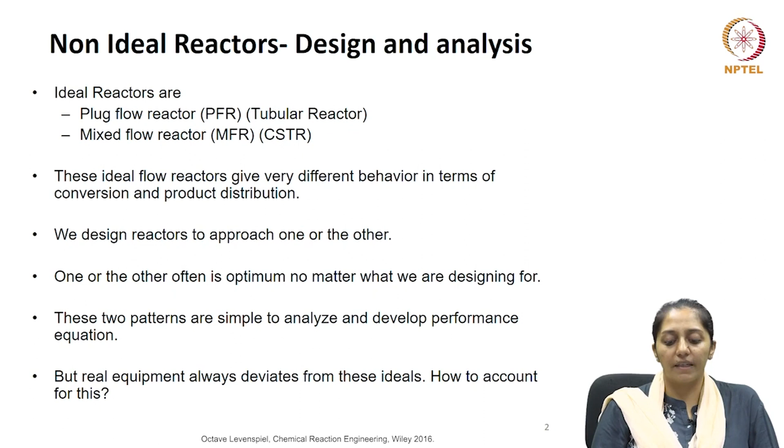But practically speaking, there is always deviation from ideality. So how to account for this deviation? First, we need to understand what are the sources of deviations. So deviation from the two ideal flow patterns can be caused by channeling of the fluid, recycling of the fluid, or presence of dead space, which is the stagnant regions in the vessel.

So if you see on the slide, various kinds of flow patterns have been shown here, including the stagnant regions shown above in the two figures, where there is effectively no mixing happening, no fluid currents are there, and then the bottom two show the channeling and the short circuiting, not going through the entire path but taking the shortest route or the least resistive route. Now this behavior is found in all types of process equipment, like for example heat exchangers, packed columns, or your bioreactors. It should be avoided since this will lower the performance of the unit.

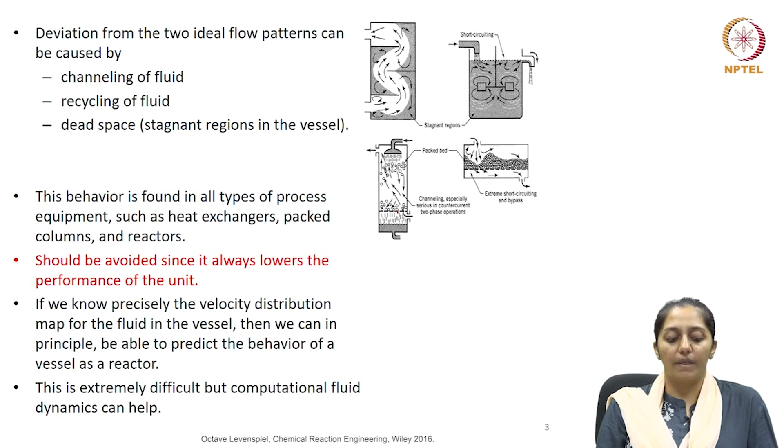So if we know the velocity distribution map for a fluid in the vessel, then in principle we should be able to predict the behavior of the vessel as a reactor, whether it will behave as an ideal reactor or there can be non-idealities. So you see, in case of non-ideal behavior, the flow patterns or the fluid movement changes inside the reactor in terms of its velocity distribution pattern. So this is extremely difficult. However, computational fluid dynamics here can help.

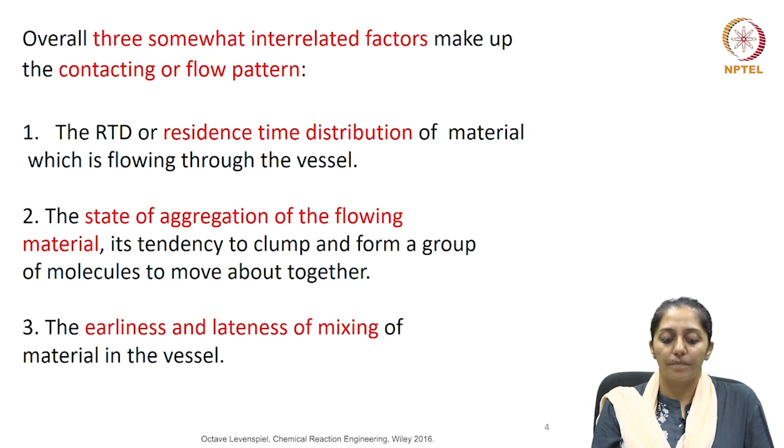So three somewhat interrelated factors make up the contacting or flow patterns. One is the residence time distribution. This is of the material which is flowing through the vessel. Then the state of aggregation of the flowing material, which means its tendency to clump or form a group of molecules which move together. The third aspect is earliness and lateness of mixing of the material in the vessel.

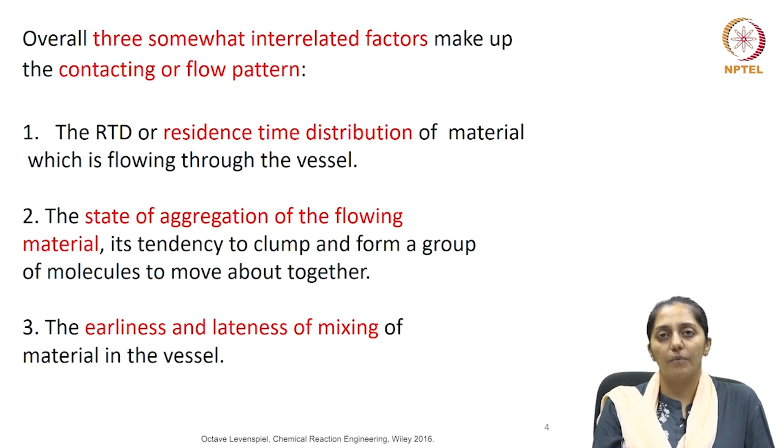So let's talk more about residence time distribution. Now for designing the reactors, it is enough if we know how long the individual molecules are staying in the vessel, or more precisely, the distribution of the residence times of the flowing fluid elements. Now, this information can be determined by using tracer techniques. It is also referred to as stimulus response experiments. The analysis is restricted to steady flow patterns without reactions and without any density change of the fluid through the vessel.

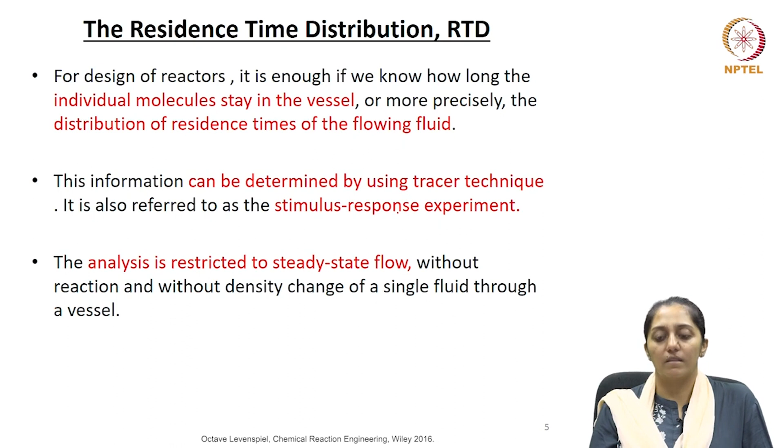So, state of aggregation of the flowing stream. If you see the picture on the slide, this is a mixing where they have shown gas mixing with not very viscous liquids. So, individual molecules are free to move about and intermix in case of microfluids. Non-coalescing droplets or solid particles or very viscous liquids are some examples of macrofluids. So, you can see here in the picture, the molecules are grouped together as aggregates or as packets. So, this is the way the two fluids can behave differently. One is the microfluid and the other is macrofluid.

So, a single phase system will lie between the extremes of the two, macro and microfluids. The solids behave as a macrofluid, while the gases will come under microfluids. Now, for a two-phase system, like for example a gas liquid system, either phase can be a macro or a microfluid depending on the contacting pattern, which means that either gas can be dispersed in the liquid phase or the liquid can be the dispersed phase in the gas.

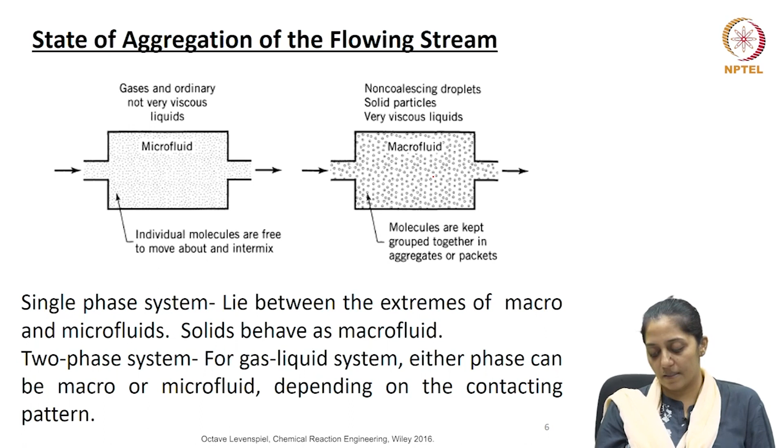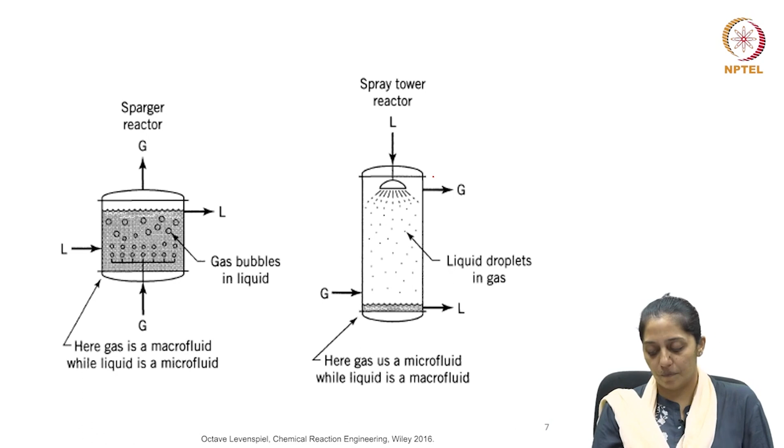So, like the picture shown here, this is a sparger reactor. Here the gas is the macrofluid while the liquid is the microfluid. So, the gas bubbles are moving up. Now, if you see a trickle bed reactor or a spray reactor, tower reactor, then the liquid becomes the macrofluid and the gas is the microfluid. The liquid is being dispersed in the gas phase.

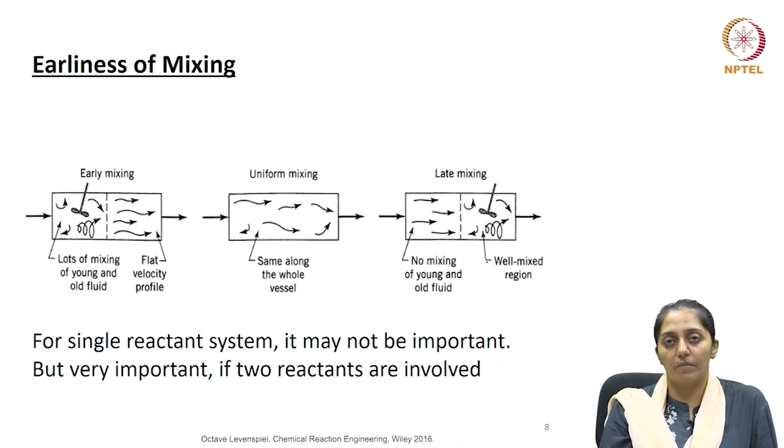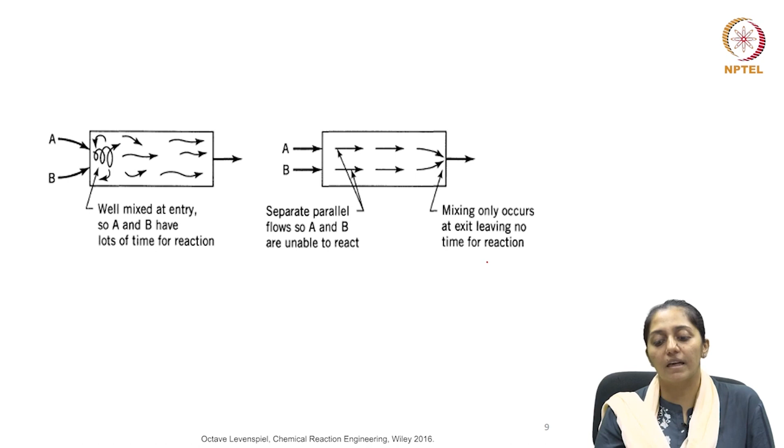Now, for a single reactant system, this may not be of that importance, but it becomes very important when there are two separate reactant streams and they are supposed to react to give the product, as shown in the picture on the slide. So, A and B have to be well mixed at the entry so that they have enough time for reaction. If A and B have late mixing, then there are separate parallel flows of A and B, they are unable to react, and only at the end the mixing is happening, so giving no time for reaction.

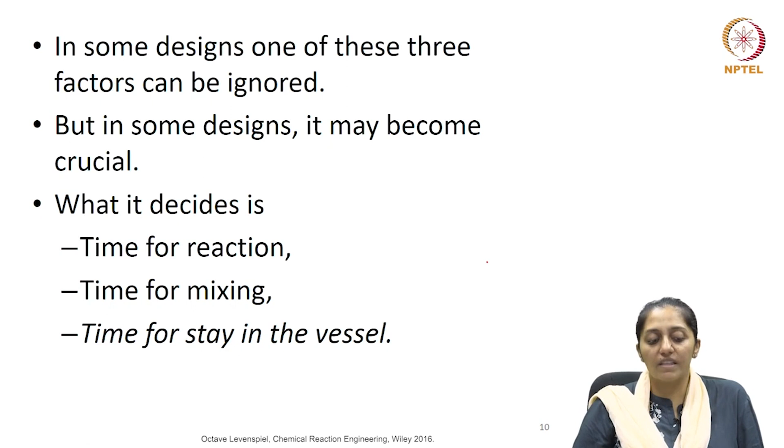So, in some designs, one of these three factors can be ignored, but in few designs it may become crucial. Why? Because it decides the time for the reaction, the time for the mixing and the time for stay in the vessel. So, all these three things are governed. So, in order to find the residence time distribution,

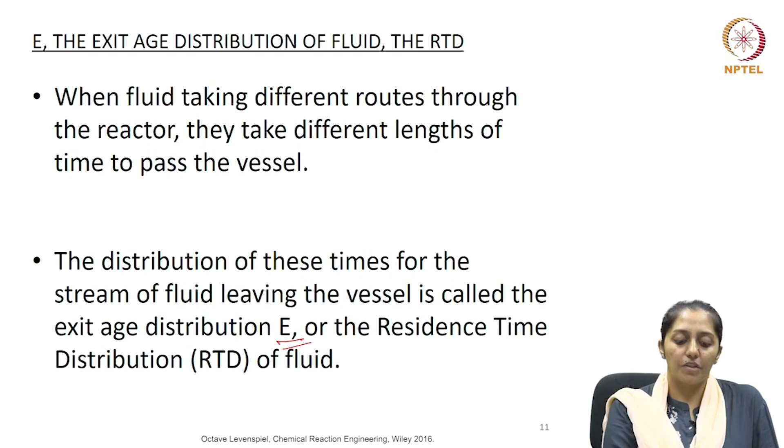which is also called as the exit age distribution of the fluid, we make use of the tracer experiments. Now, when the fluid is taking different routes through the reactor, they can take different lengths of time to pass the vessel, isn't it? Now, if we consider all these different fluid elements entering the reactor, going through different time spans inside the reactor before they pass the vessel, this distribution of times for the stream of fluid leaving the vessel is called the exit age distribution, denoted as capital E, or the residence time distribution of the fluid. So, I will repeat, the distribution of these times for the stream of the fluid is called an exit age distribution, denoted as capital E, which is same as the residence time distribution. We generally call it RTD of the fluid.

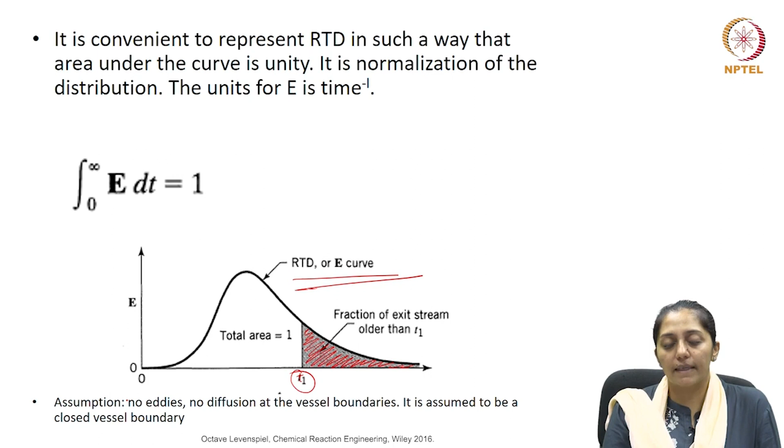Here we are assuming that there are no eddies, no diffusion at the vessel boundaries, and it is assumed to be a closed vessel boundary. So, using the E curve, one can determine the fraction of the exit stream older than a particular time or age. So, the fraction younger than age t1 can be given in terms of the integral from 0 to t1 of E dt, the portion shown in white color here. So, the fraction older than t1 would be 1 minus the integral from 0 to t1 of E dt, which is the same as the integral of E dt with the time limits of t1 to infinity.

So, the E curve is the distribution needed to account for the non-ideal flow. Now, how to find it for a vessel?

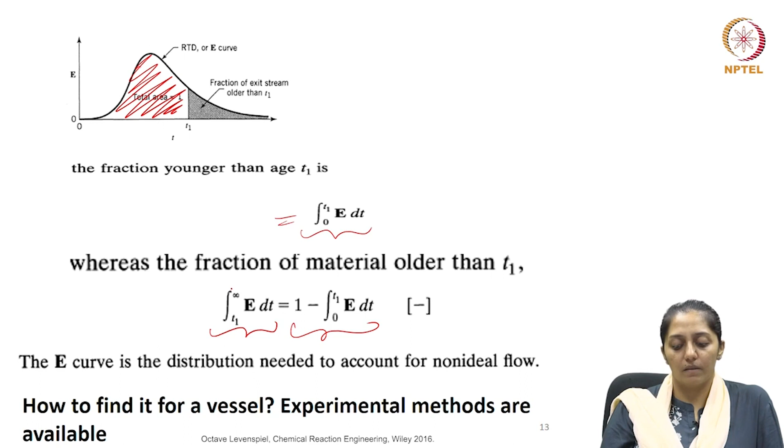The simplest method is to use a non-reactive tracer for finding the E curve. Here you can make use of a pulse input, a step input, a random input, or periodic inputs. Mostly pulse and step inputs are used because they are easy to analyze, as shown on the picture here.

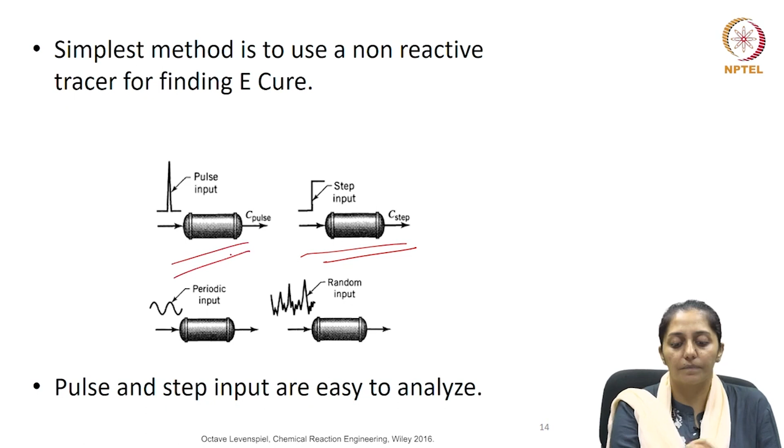Let us take first the pulse input. In the pulse tracer experiment, please make note of the notations to be used here. Let the vessel volume be V meter cube. The fluid flow is represented by small v, and the vessel volume by capital V. Into the fluid entering the vessel, we instantaneously introduce m units of tracer, in kgs or moles. So, this is a pulse experiment.

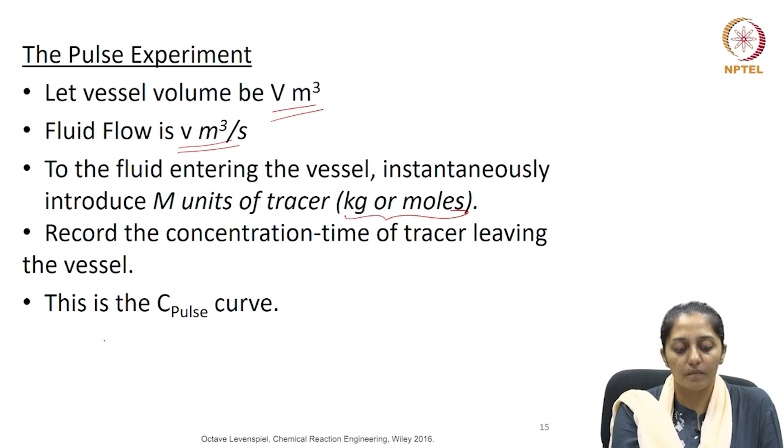So, suddenly we introduce m units into the entering fluid, and at the same time we begin recording the concentration versus time profile of the tracer leaving the vessel on the other end. So, here we are giving the pulse input and here we begin recording the concentration versus time of the tracer. Now, this concentration versus time profile will be called the C pulse curve.

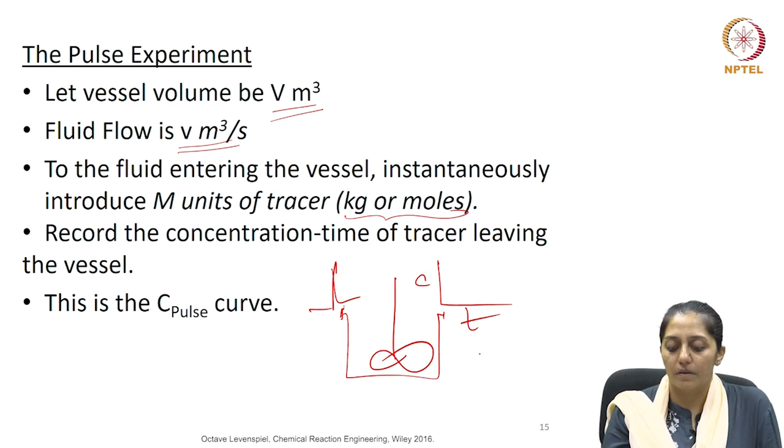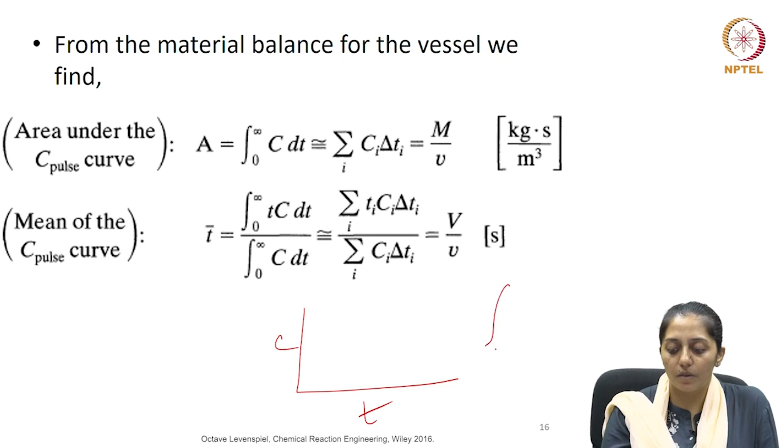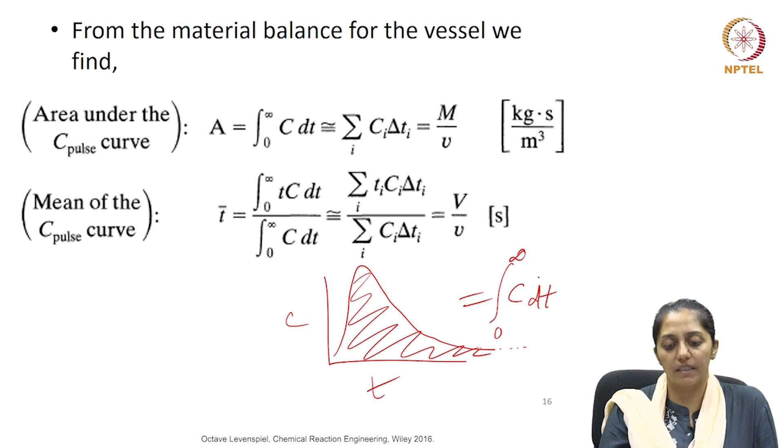If we do the material balance for the vessel, we find that the area under the C pulse curve can be written as the integral from 0 to infinity of C dt. So, this will be the entire area under the curve. In terms of small equidistributed time intervals delta t, we can reduce it to the summation of Ci delta Ti, which is nothing but the total amount of tracer which was added divided by the volumetric flow rate, in meter cube per second. So, this is the area under the curve.

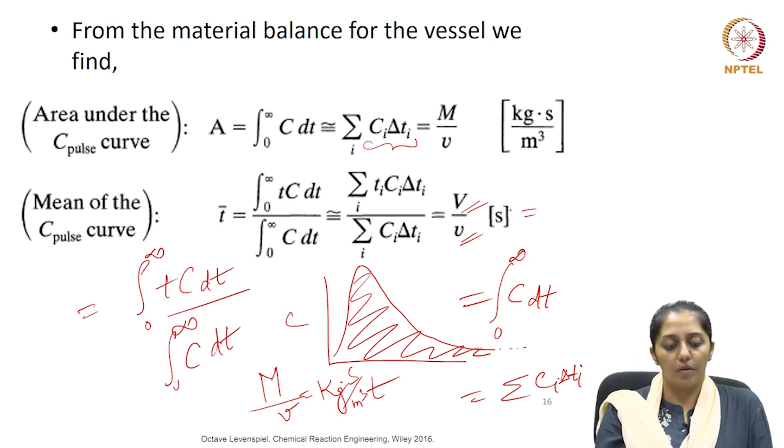Now, the mean of this curve can be determined by using statistics as shown here. So, your mean residence time can be obtained. We now know it is F by V inverse, which is V by F, the volume divided by the small v, volumetric flow rate. As the m amount of tracer is instantaneously introduced into the fluid entering the vessel, when we start noting down the concentration, it will rise to a value and then start decreasing because of the subsequent dilution by the incoming stream.

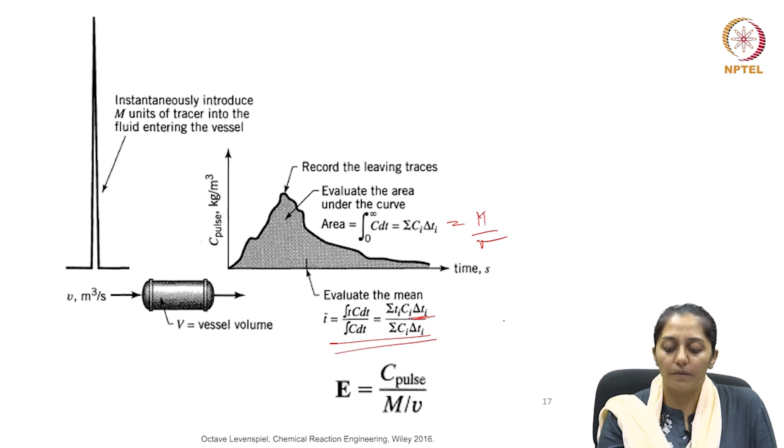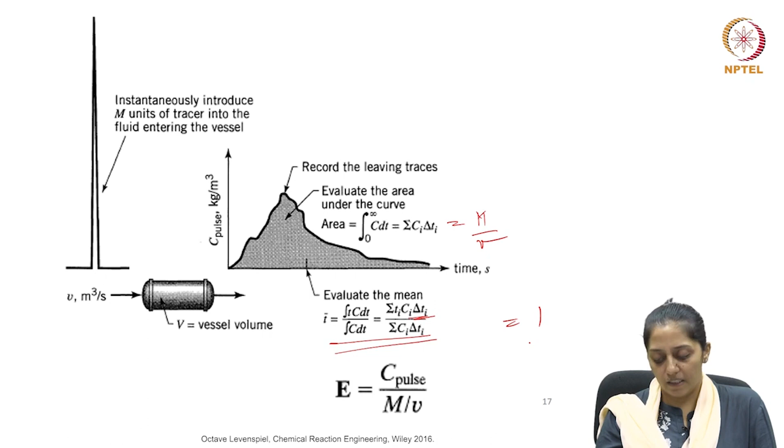So, the area under the curve is nothing but m by small v, and the mean residence time can be given as the summation of Ti Ci delta t divided by the summation of Ci delta t. So, your E curve can be obtained from the C pulse curve. Now, the area under the curve is equal to 1 for an E curve. So, if we divide the C pulse values by m by v, then we should be able to get the E values. This is what is done to convert a C pulse curve to an E curve.

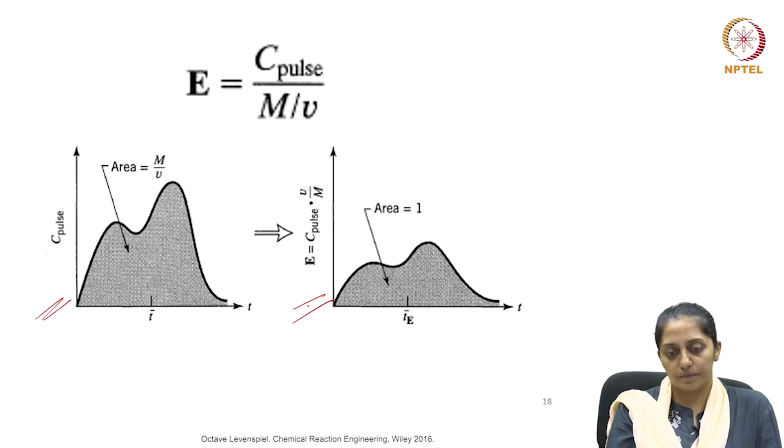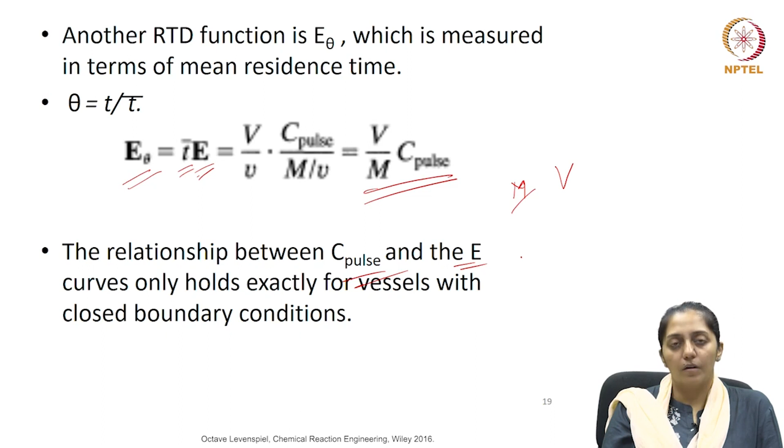Now, another RTD function is called E theta, which is measured in terms of the mean residence time. Here E theta is the mean residence time multiplied by the E values. The residence time is nothing but V by v, which is capital V by small v, and E was given as C pulse by capital M by small v. So, effectively E theta values can be obtained from the C pulse curve if we divide the corresponding C values by M and multiply by the volume. So, now we have the correlation between the C pulse, the E curve and E theta, which is true for vessels with closed boundary conditions.

Now, if we use a step input rather than a pulse input, how does it change? How do we determine the E curve? When we use a step input, this is how it can be demonstrated. At time t equal to 0 or less than 0, there is no tracer, and at time t greater than 0, let us assume the amount of tracer being dropped in is m dot, which is in kg per second.

Small v again is your volumetric flow rate, capital V is the volume of the reactor. So, once we start sending in the step input, we start determining the concentration at the exit of the tracer. Being a step input, the profile would look like as shown here. We will call now the concentration profile as C step versus time profile, and it will take a form as shown here. So, gradually the new fluid is going to take over the old fluid.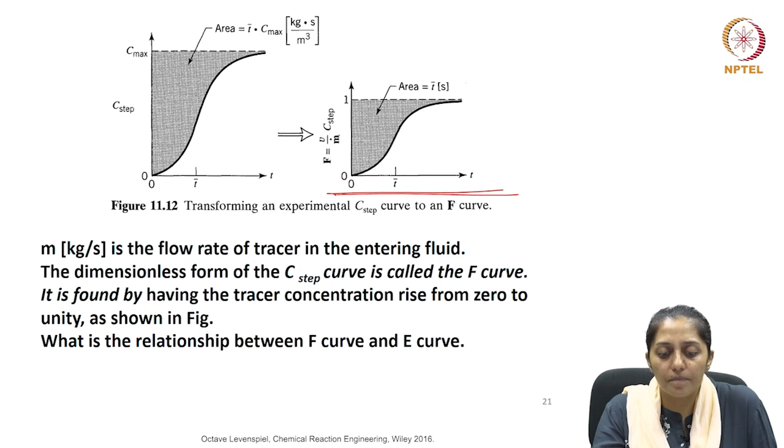So, now let us see how we can relate F and E values. Your F value, in order to change it to C max, it will become C step divided by m dot by V. So, how do we relate E with the F values? Imagine a steady flow of the white fluid, then at time t equal to 0, we switch to a red and record the rising concentration of the red fluid in the exit stream. And then we obtain the F curve.

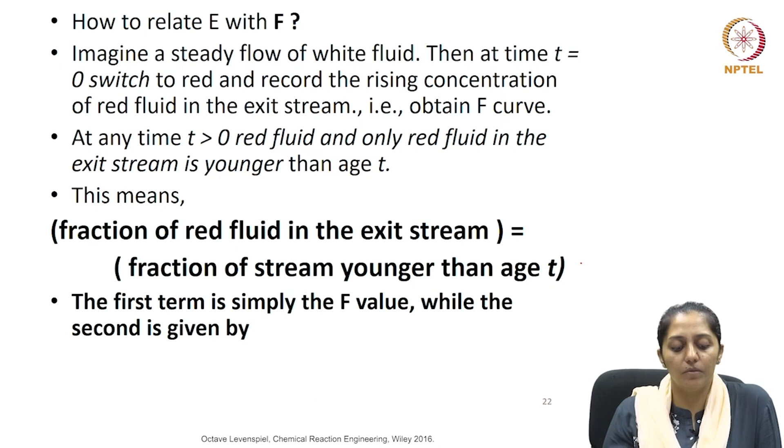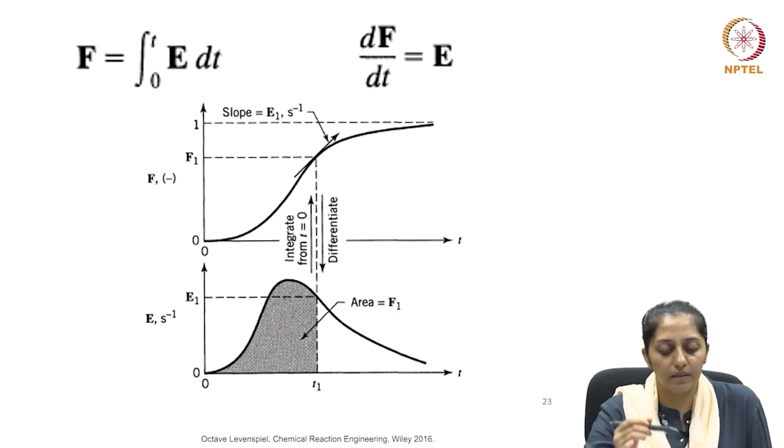At any time t greater than 0, the red fluid and only the red fluid in the exit stream would then be younger than the age t. This means that, as you see on the screen, the fraction of the red fluid in the exit stream is equal to the fraction of the stream younger than age t. The integral from 0 to t of E dt is F, which is the fraction younger than time t. So, if the integral from 0 to t of E dt is F, then dF by dt is E. So, if you have the F curve, at every time point, if you find the slope at that point in the F curve, you can determine the value of E, and this is how F can be changed to the E curve as shown in the picture here.

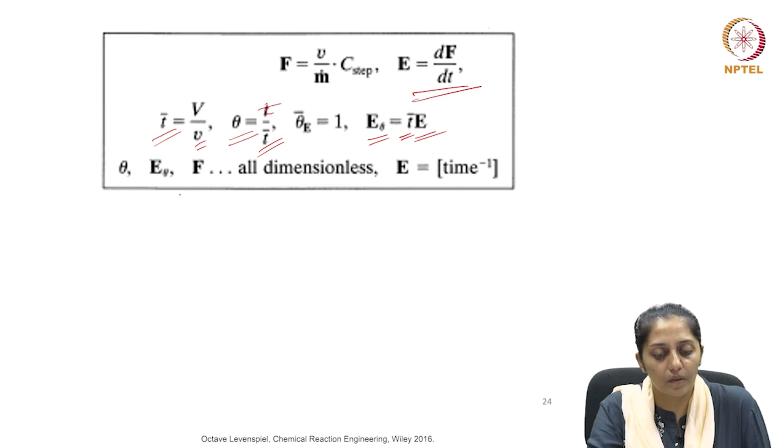So, now just to consolidate, F is related to C step, where E and F are related as shown here. E is equal to dF by dt, and your mean residence time is V by v, where v is the small v, and theta is the dimensionless time factor where the time is divided by the mean residence time. So, E theta is related to E by the mean residence time. Your theta, E theta, F, they are all dimensionless entities, and E is time inverse.

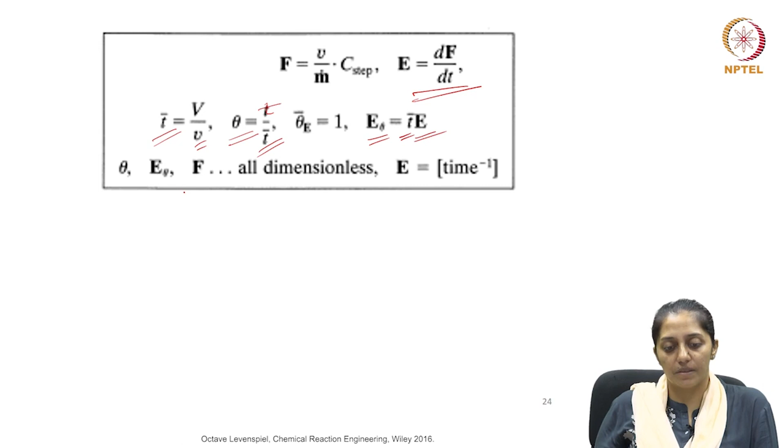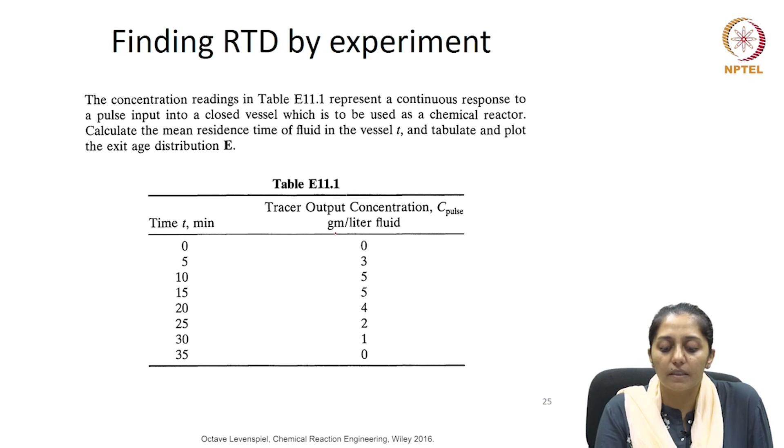So, let us try to find the RTD where an experiment is done using a pulse tracer, and the data collected of the concentration of the tracer at the exit with respect to time is shown here in the table. Now, it is asked to determine the mean residence time of the fluid and to plot the exit age distribution, which means the E versus t curve. What we have in hand is the C pulse, and the unit given here is grams per liter. So, effectively we can first find the area under the C pulse versus t curve, and then divide by it to get the E values. So, how to find the area under the curve?

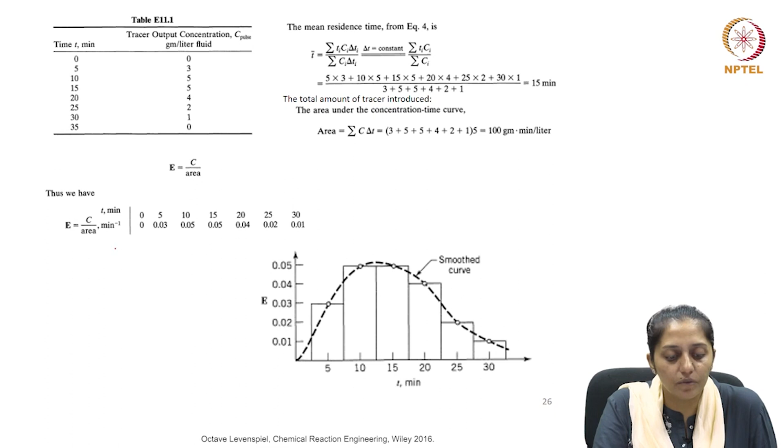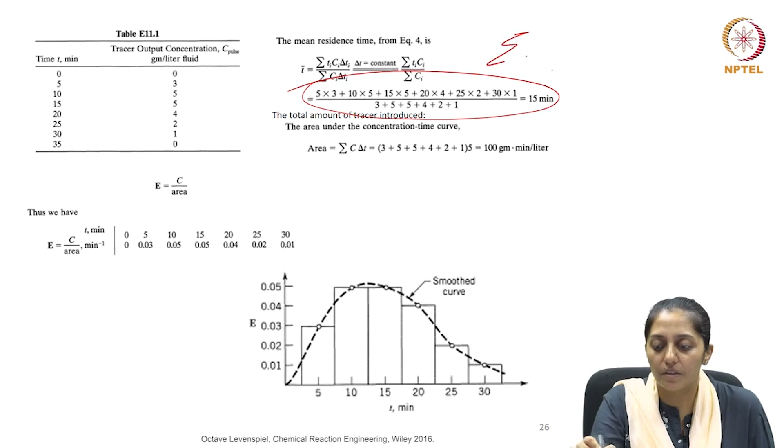First we calculate the mean residence time. You see the time intervals are equally spaced, so we can take delta Ti as 5 minutes here. So, we will have summation Ci Ti by summation Ci. If we do that as shown here on the right hand side, calculating summation Ci Ti by summation Ci using the table data, we find that the mean residence time is 15 minutes.

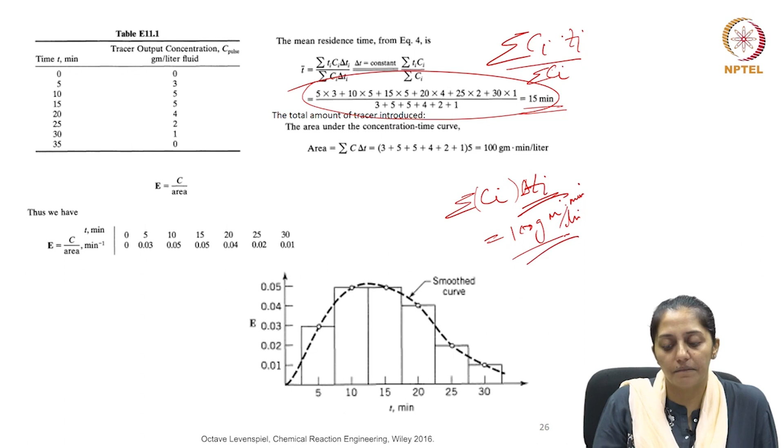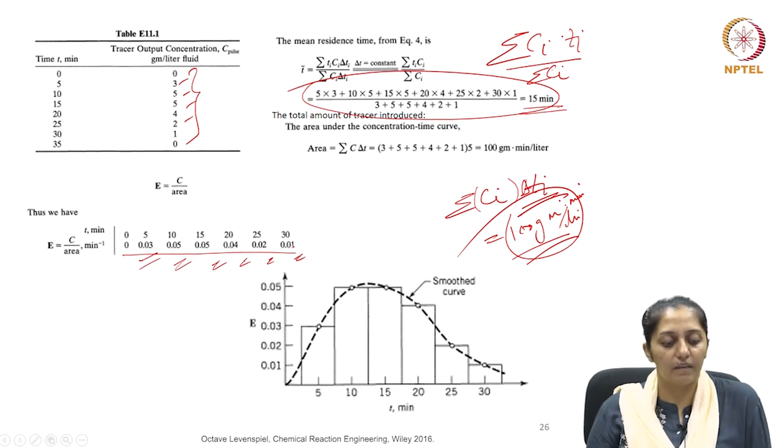If the mean residence time is 15 minutes, the area under the concentration time curve can be given as the addition of all concentrations multiplied by delta Ti, which is 5 minutes. So, we calculate the area as 100 grams per liter into minutes. Now, we divide all these C pulse values by this area, which is 100, and we get the corresponding E values. So, if you divide all these C values by 100, you will get your E values. So, this is your E curve, E versus t curve.